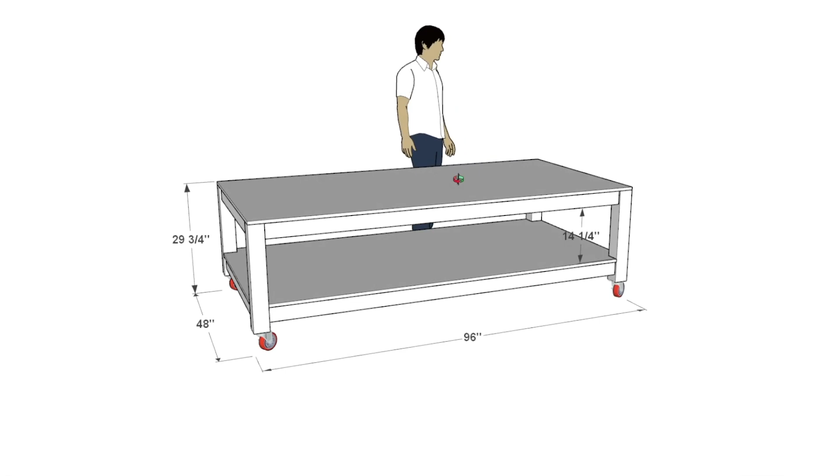It has been an upgrade from having to build things on the garage floor, bending over, feeling like my back would give out at the end of the day. This bench makes building super easy. Alright, now before we jump into the actual build process, let's briefly overview this bench and go over what makes it so special. This way you can see if this is what you're looking for and you can decide if you should continue watching this video.

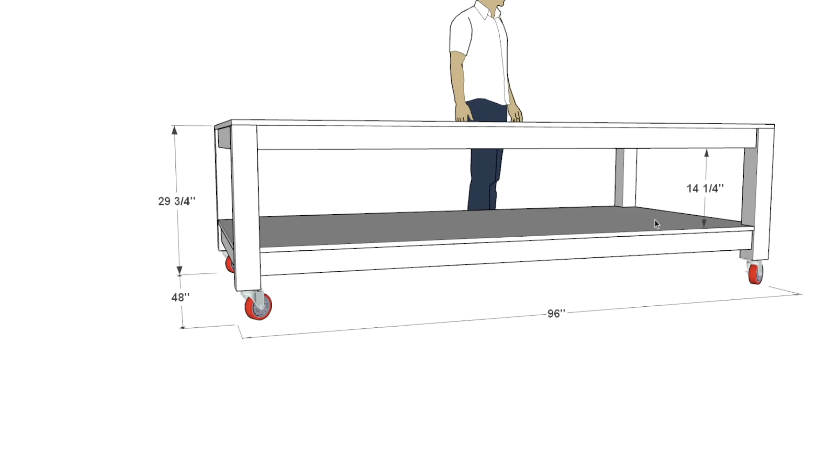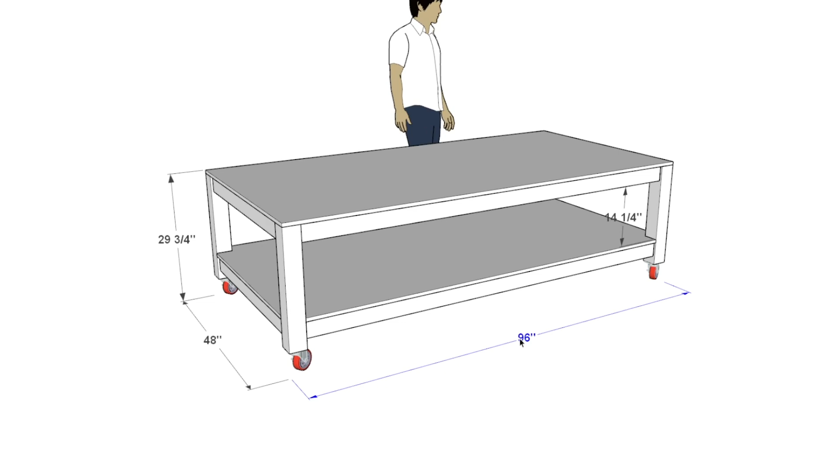Alright, so firstly, the bench is standard height. I initially thought about making it counter height because I thought it would be easier to build on. Then I realized when I have things I'm actually working on, they do take up room too. And honestly, for me, being 6'1", this is the perfect height. The overall dimensions are 96 inches by 48 inches by 29 3/4 inches tall, with the shelf at 14 1/4 inches.

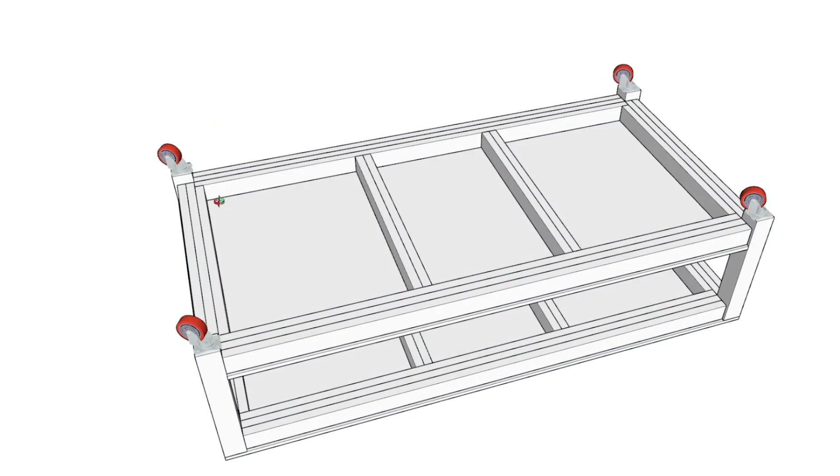So if we turn the table over, we can see what the frame looks like and why this bench is so heavy duty and has lasted for so long. This bench can hold some serious weight because its frame is reinforced with 3 layers of 2x4s, and the whole thing rolls around on 4-inch polyurethane swivel plate casters with brakes, and each of those wheels has a 400-pound load rating. The table is really good at moving things from point A to point B in my shop. For example, from the cutting station to the planing station.

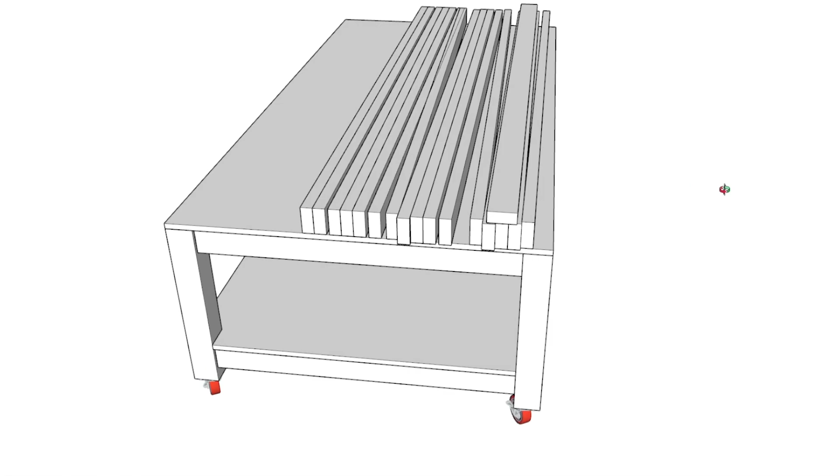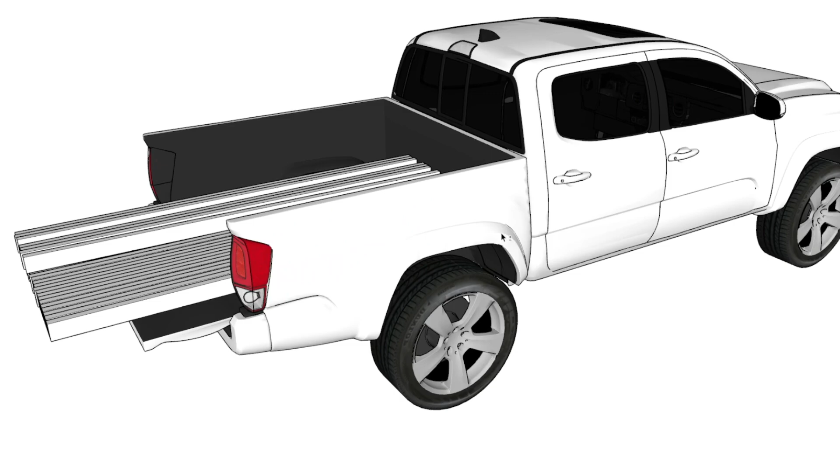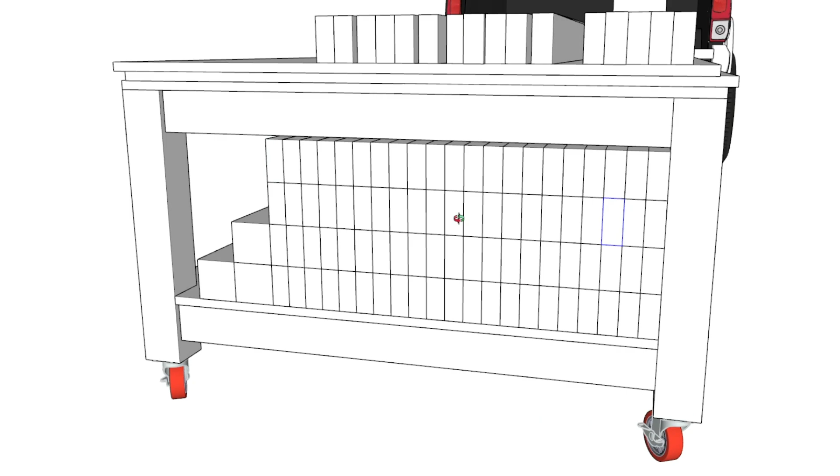It's also a really good lumber cart and lumber storage cart. When I would get a project from a customer, for example, I would just buy all the lumber at once, roll up the cart directly to the truck, and just load the workbench with the raw lumber. The top of the bench is pretty much level with the truck bed, so this made it really easy. And this workbench can handle 100 plus 2x4s in its storage shelf. Most of the boards I would work with were 8 foot long anyways, which fit in perfectly. And this was awesome because it left the top of the workbench empty so that I could continue working and utilize it for the actual build.

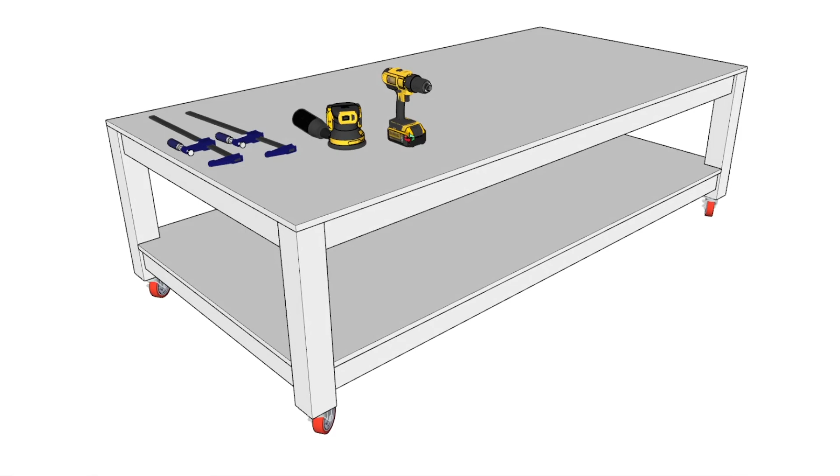The workbench is also a good place to store tools that are needed for a specific project. I know that each tool has its place in the shop, but when it comes to a specific project, like when I would get commissioned to build a patio set or a kid's playhouse or whatever, then I could just have the appropriate tools on hand and just store them underneath for quick access.

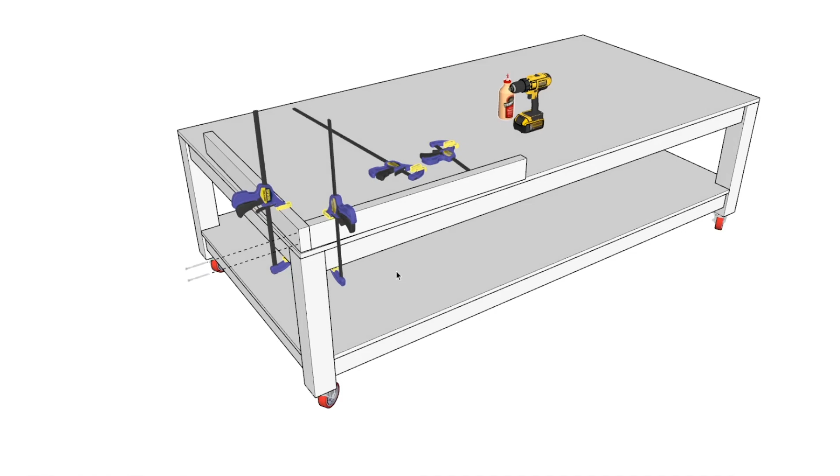My favorite part about this workbench is the ability to actually build things on it. First, it has a level surface. If you buy a 3/4 inch thick plywood sheet, it won't bend easily and it'll stay level. You can easily attach clamps at pretty much any place on the workbench top to hold lumber in place as you drill it, glue it, secure it with screws.

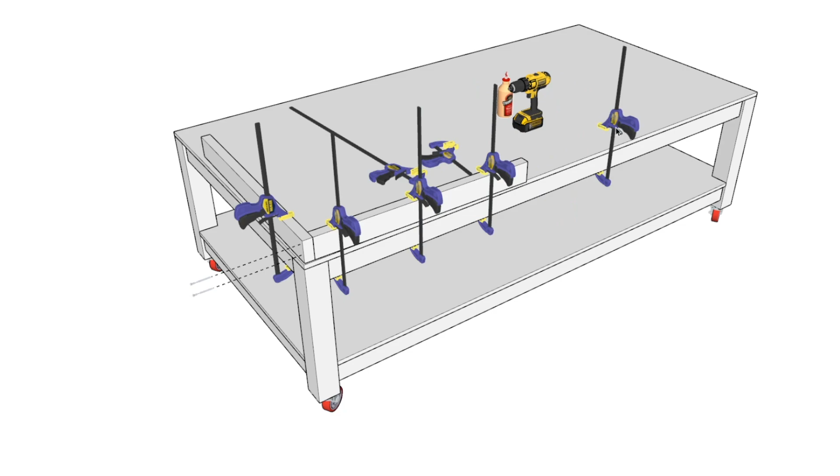This has been a real game changer for me as it allows me to make things so much neater. I don't have to rely on my body weight, for example, to keep things together as I secure them. I can use clamps and it's so ergonomic. The table height is just what I need, and I don't really do anything off the ground anymore. I build everything on the table unless it's a really big or bulky project. The table is also 8 foot long and it accommodates most projects.

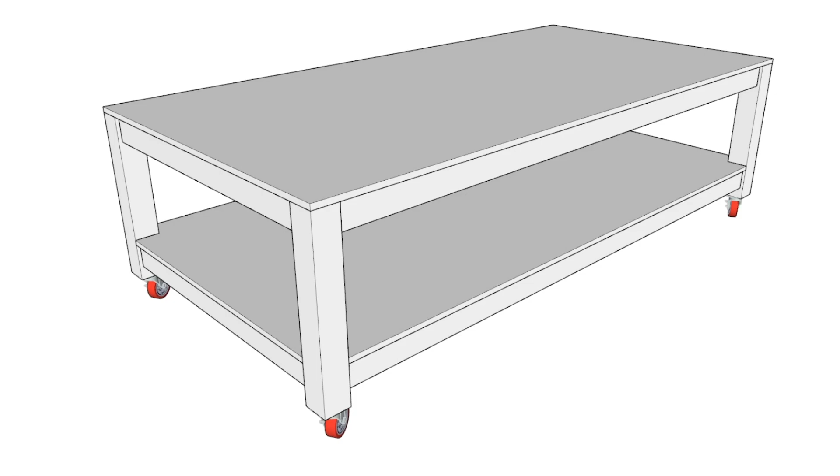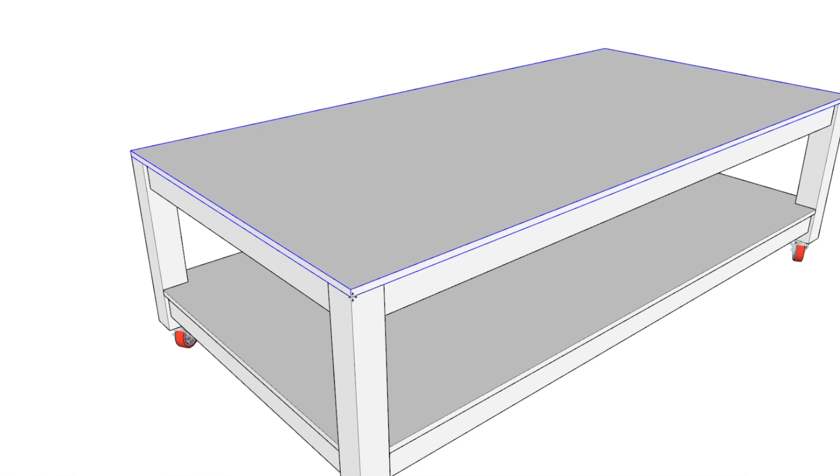And one last important thing to mention is that the tabletop will go through wear over the years. What I love is that it's actually just a full plywood sheet. So this means that it can be easily replaced. If you just flip the plywood sheet after a year or so, you will have a brand new surface. You're getting so much value out of the bench worktop. It's just awesome. I flipped mine after about 5 years of use and I had a brand new surface to work on. After both sides are used up, just buy a new plywood sheet. Easy.

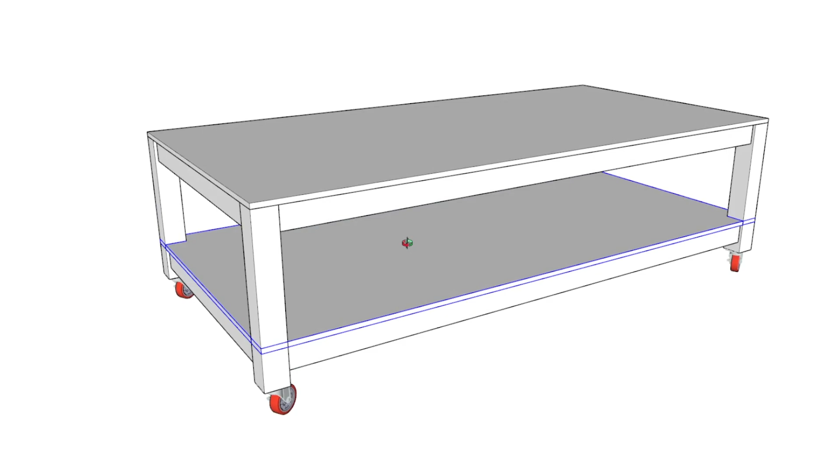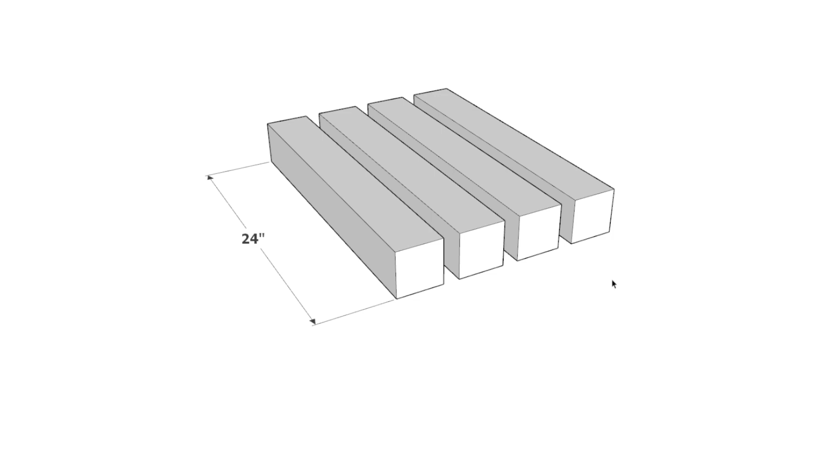Alright everyone, so let's go ahead and actually see how the workbench is made. First, you're going to start by cutting 4 24-inch 4x4 lumber pieces. These are going to be the legs of the workbench. You're going to need 12 89-inch 2x4 pieces.

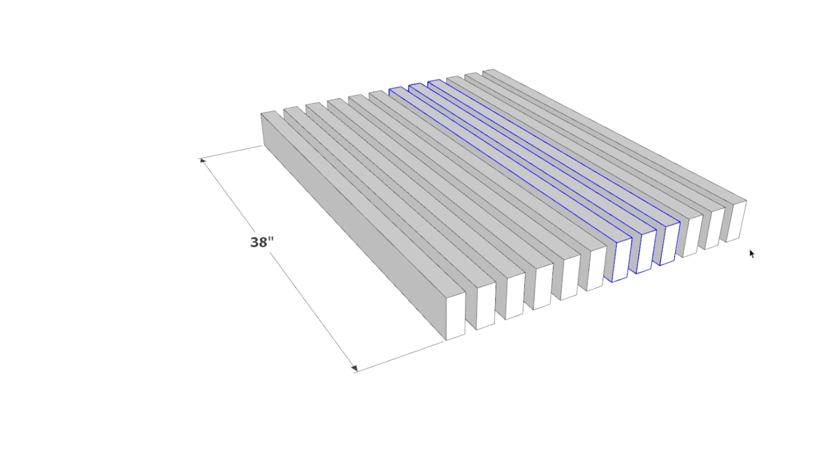You're going to also need 8 41-inch 2x4 pieces. And you're also going to need, let's see, it looks like 12 38-inch 2x4 pieces. You will also need 2 full-size plywood sheets, 96 by 48, ideally at least 3/4 inch thick.

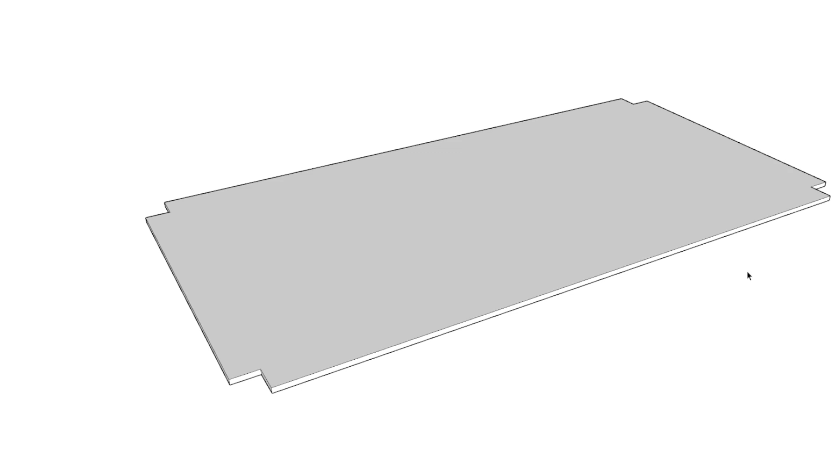Take the first plywood sheet and then just cut some notches into all 4 corners. These are going to be 3.5 inches by 3.5 inches, and you'll see how these work with the 4x4 legs that will go in through this area.

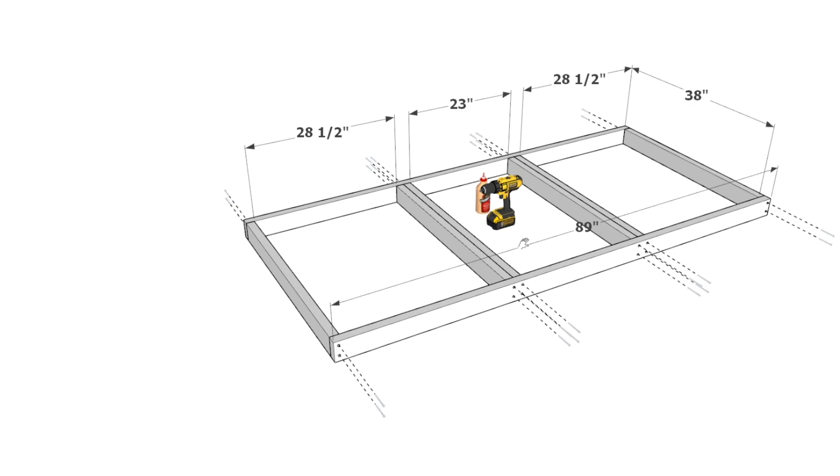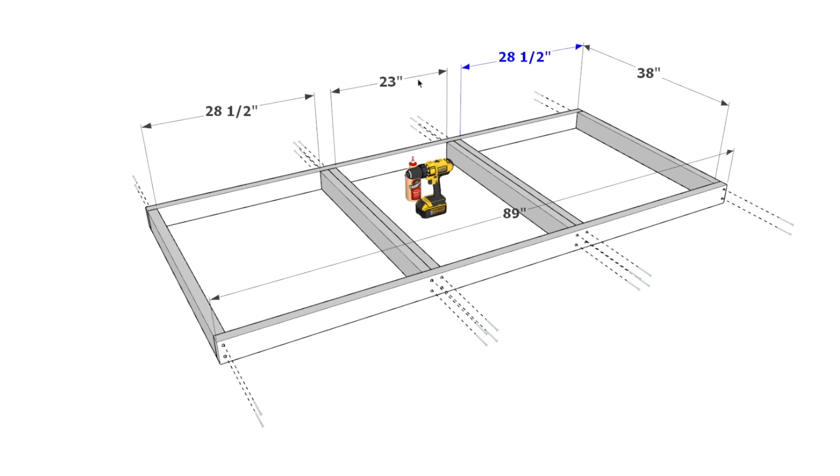Okay, so let's start building the frame of the workbench. So first you're going to need to take 2 89-inch 2x4 pieces and then 4 38-inch 2x4s. And then go ahead and use 3.5 inch screws and generous amounts of glue and just secure these in place at these distances.

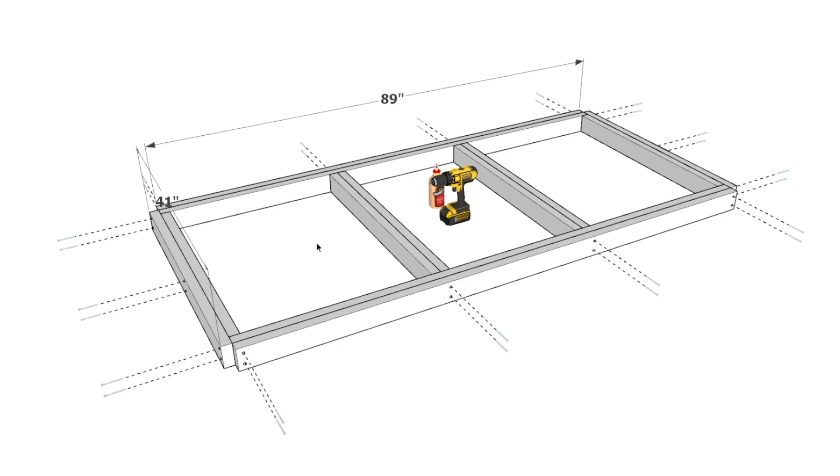Okay, let's go ahead and continue to build up the frame. So you're going to add the next layer of the frame. You're going to need 2 89-inch 2x4 pieces, 2 41-inch 2x4 pieces, and then use glue and in this case use 2.5 inch screws, because once you put them in you don't want them to show through to the other end. So 3.5 inch initially and now 2.5.

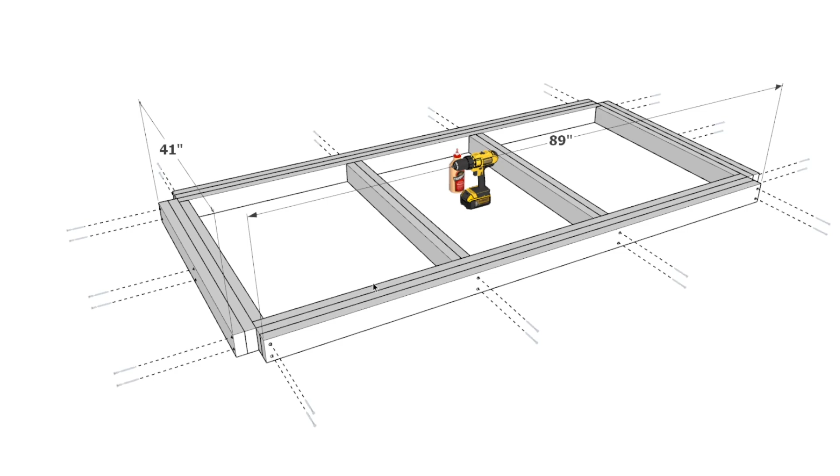And then you're going to add one more layer here. So you're going to need again 2 more 89-inch lumber pieces and then 2 more 41-inch lumber pieces. And in this case, use 3.5 inch screws because they won't show through, but you want it to be secure. And once you've got that, just go ahead and make a second identical frame. So these should be pretty solid pieces at this point.

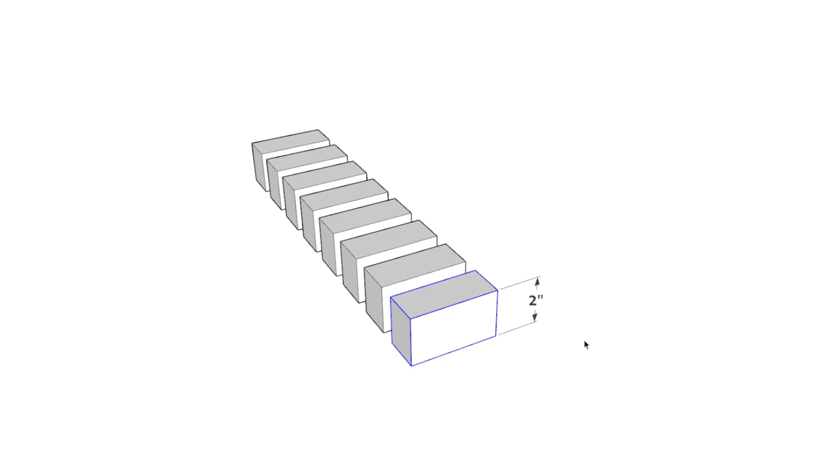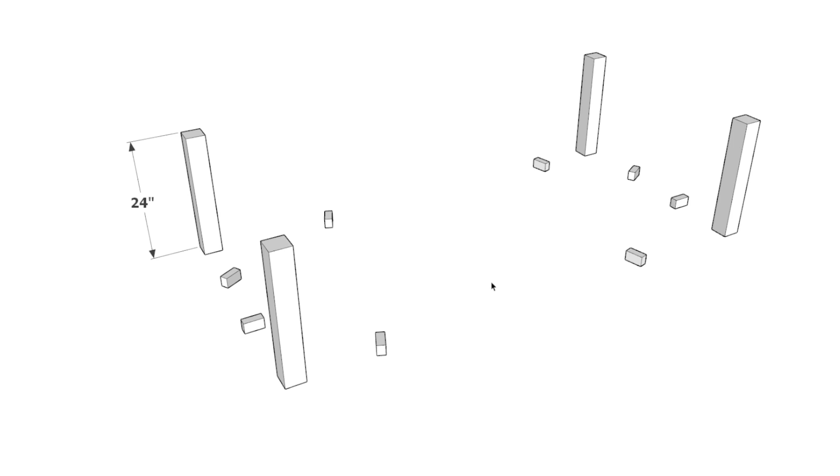Okay, now to secure the legs to the frames that you just made, you're going to need to cut some spacers. These are 2-inch-long 2x4 pieces, just from some of the scrap lumber that you're going to have from this project. And then go ahead and lay them out like this in a rectangular shape. You're going to put the 4x4 24-inch legs here as well, and then put your first frame directly on top of those spacers, and then the 4x4 legs into those grooves.

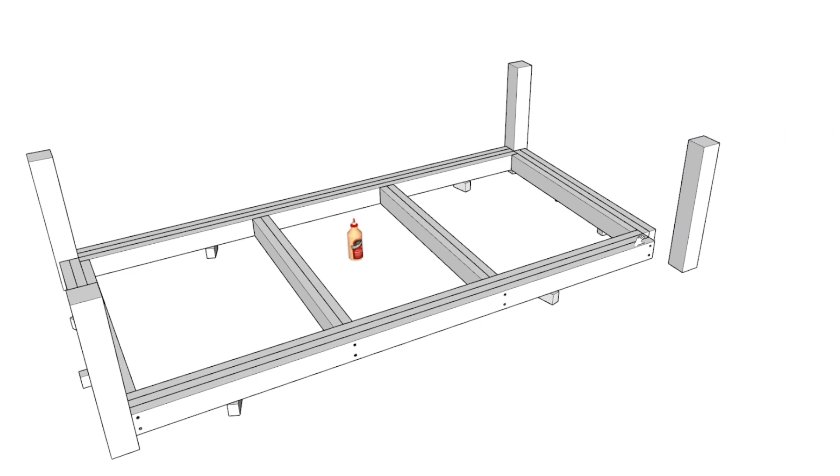Use generous amounts of glue for all of the areas that are going to be making contact with the post. So put glue on the ends here as well as on the post, just so that there's a good amount of glue, so it's a nice secure joint.

Okay, now for this step you're going to use ratchet straps. So if you don't have one that's long enough to go all the way around, just use 2 and then hook them together. And basically you're going to wrap this around the legs and then tighten it, but not super tight at this point, because you want to make sure that you're working on a leveled surface, and that none of the legs are higher or lower than the others. Everything has to be nice and leveled.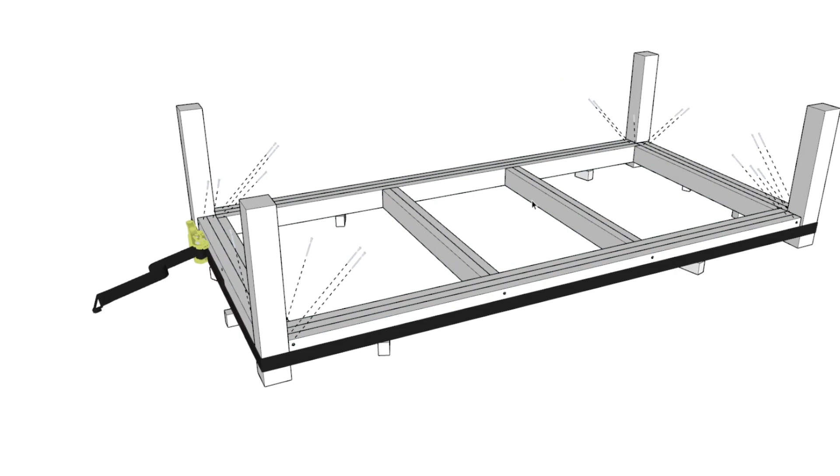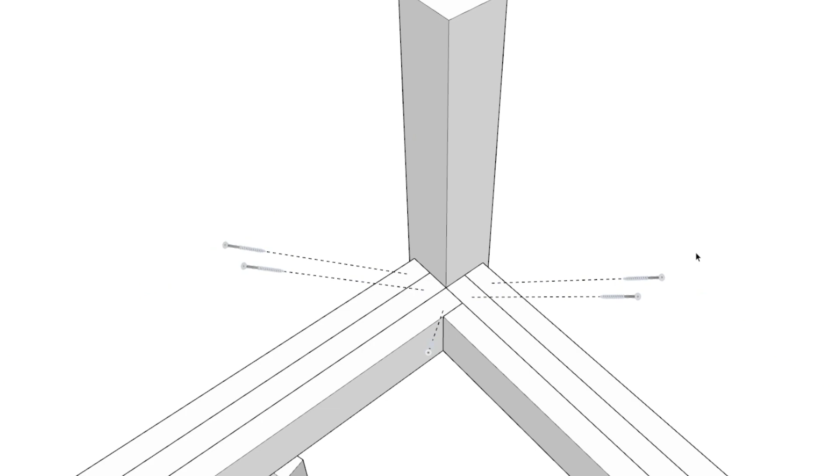Once you have everything in place, if you need to use a hammer, just kind of hammer things into place. Then go ahead and tighten the straps as tight as you can. They have to be really tight at this point, and then start adding these screws. So these are 3.5 inch screws, really important to pre-drill at this point. So use a countersink drill bit or just a drill bit to pre-drill those holes, and then add 3.5 inch screws like that. And this will be for all 4 posts.

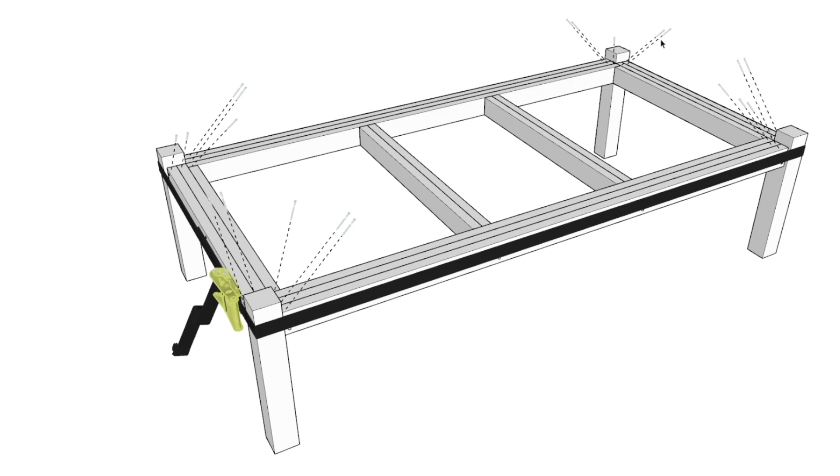Then with the help of a friend, flip the table over so it's standing like this, and you need to make sure that you're not putting pressure on the post as you're flipping them. So do it mid-air. The glue isn't dry yet and you haven't added all the screws, so it's not super strong at this point. But here, do the same thing. So pre-drill holes and then add 3.5 inch screws.

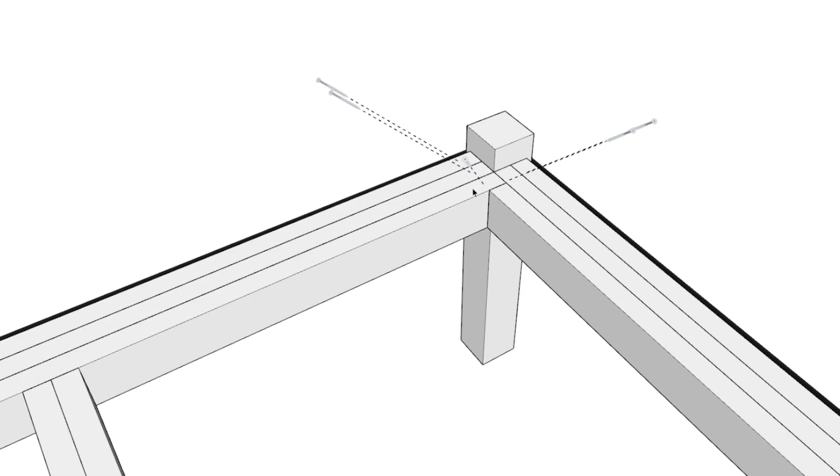At this point, if you're concerned about collision of screws or maybe your drill bit colliding with some of the existing screws that are already in there, just use an old drill bit or an old countersink drill bit, so that you're not going to feel bad if you do end up hitting one of the screws.

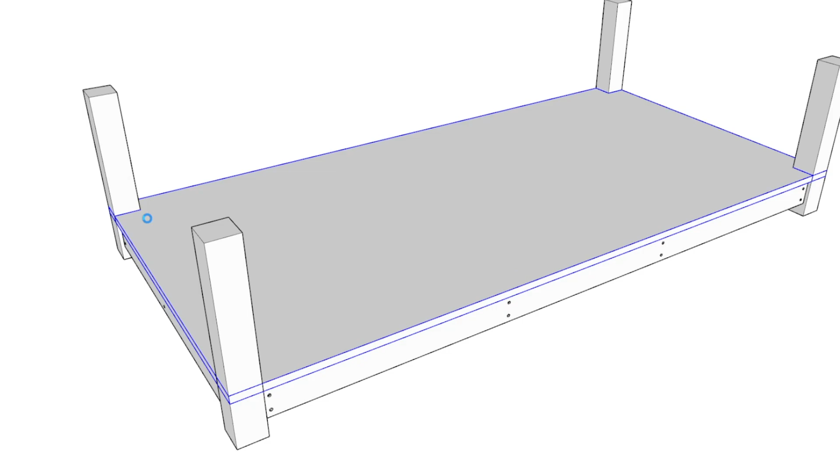So go ahead and add that to all the sides, and take that plywood sheet that you've cut notches into, and then just go ahead and place it here, so it'll go right there. And then this plywood sheet you can secure with just screws, or if you'd like, you can also add glue. This is not the surface that would typically be replaced. That would be the work surface. So just use 3.5 inch or 2.5 inch screws, add glue, and it should be secured.

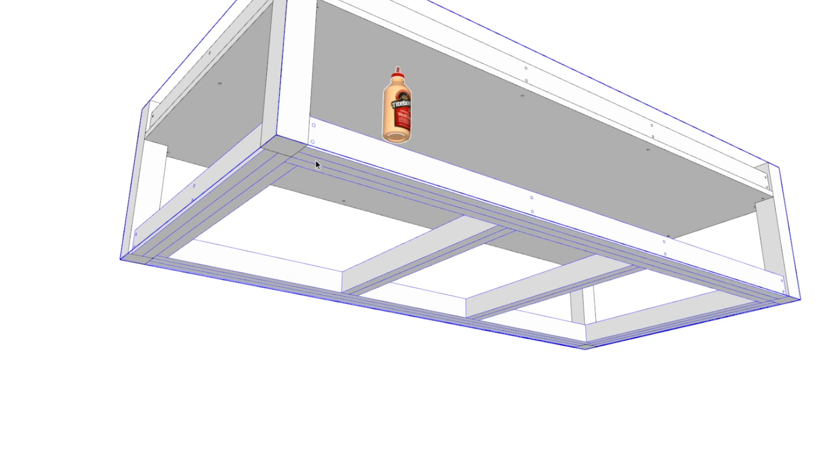So there it is. Okay, now to add the next frame, just flip the table over again, and what you're going to do is make sure that the frame is flush with the 4x4 posts here, or 4x4 legs. And then, just like before, add generous amounts of glue. Make sure that you have it on all sides, and you're going to start adding screws.

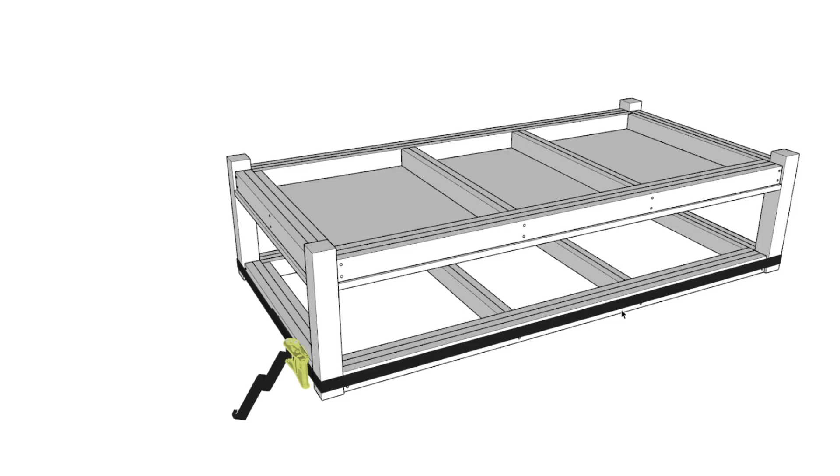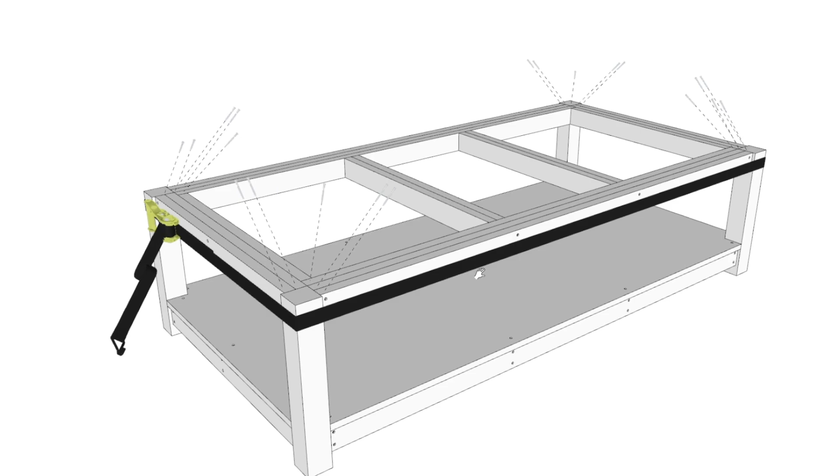So add the straps like before, again loosely at first, hammer things into place or into submission so that it all goes into the correct spot. And then go ahead and add the 3.5 inch screws. Again, make sure that you pre-drill so that the wood doesn't split. And then, with the help of a friend, flip the table over. It should be pretty heavy at this point. And then go ahead and add those from the top as well. And then release the straps.

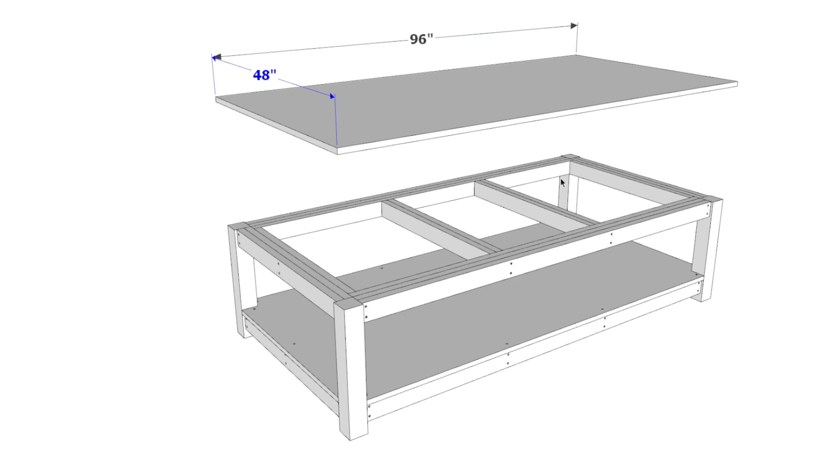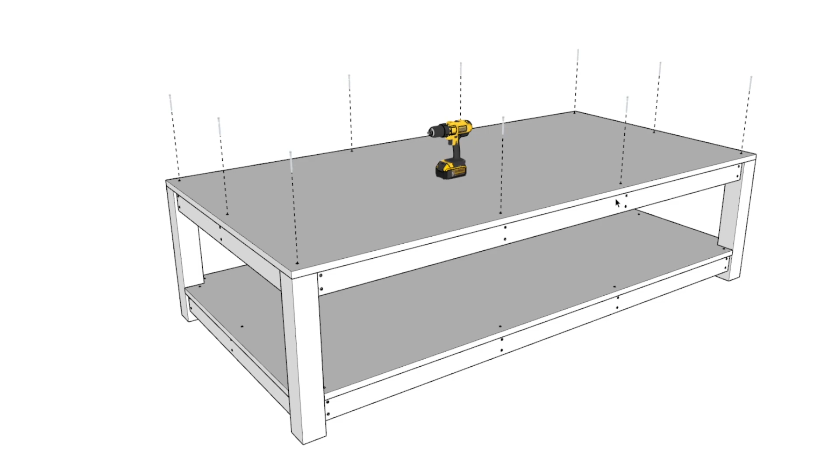And so at this point, you're going to add the workbench top. So it's just a full plywood sheet, 96 by 48. And then secure it in place using 3.5 inch screws or 2.5 inch screws. And I'm showing glue here, but I actually would not add glue here. The reason why is because you want this surface to be replaceable. You want to be able to turn it over when it's gone through some wear and tear, and you need a perfect and leveled surface once again.

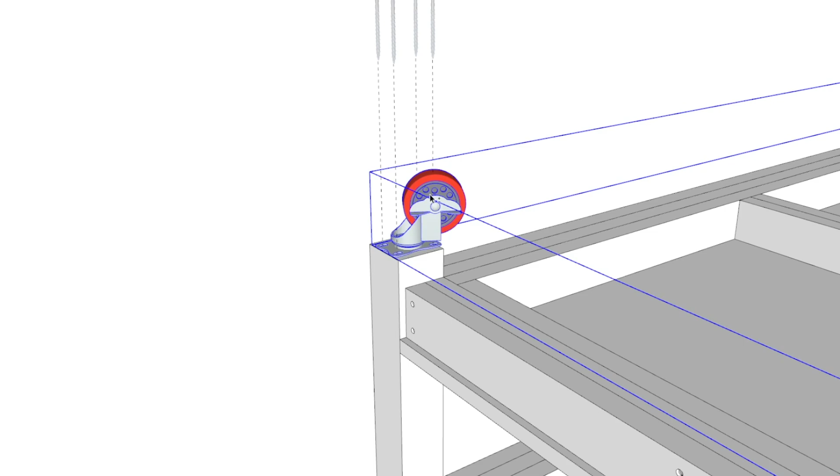So all right, now let's go ahead and add the wheels to this workbench. So the wheels make it super useful, honestly. Without these wheels, it's just a table that's going to sit in the corner. So what I've done is I've used the wheels from Home Depot, and this model shows that they kind of overhang a little bit. They actually do that in real life. So what I did is I just kind of centered it as best as I could.

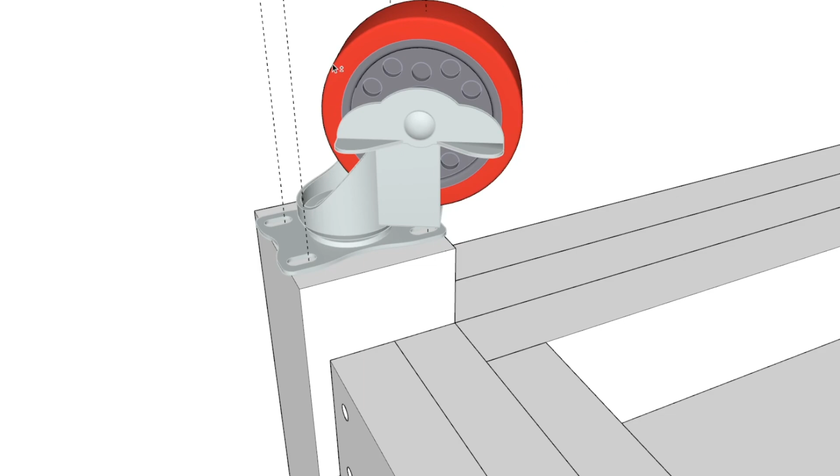And to secure the wheel to the leg, I actually used 4-inch long screws. Now these screws are thick. They're going to be really fat usually. So to make sure that this post does not split, because not only is it holding the weight, but also these two frames are attached to it, you really need to pre-drill this here.

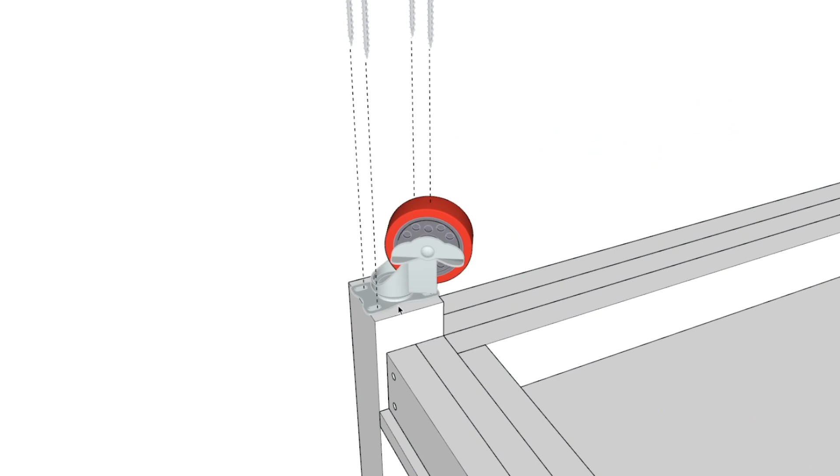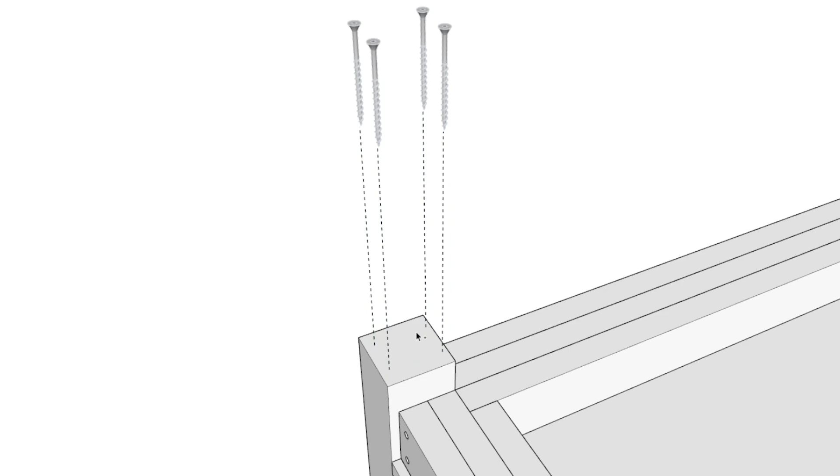So what I did is I used a nice thick drill bit, and I just marked the area here that I needed to pre-drill. Then I drilled those holes pretty much the entire depth of the screw, maybe left a little bit so I could still catch. And then I added these to the wheel so that it was nice and flush. And that way the wheels are going to stay in place and they're going to be able to do their job, and then you're not splitting that post.

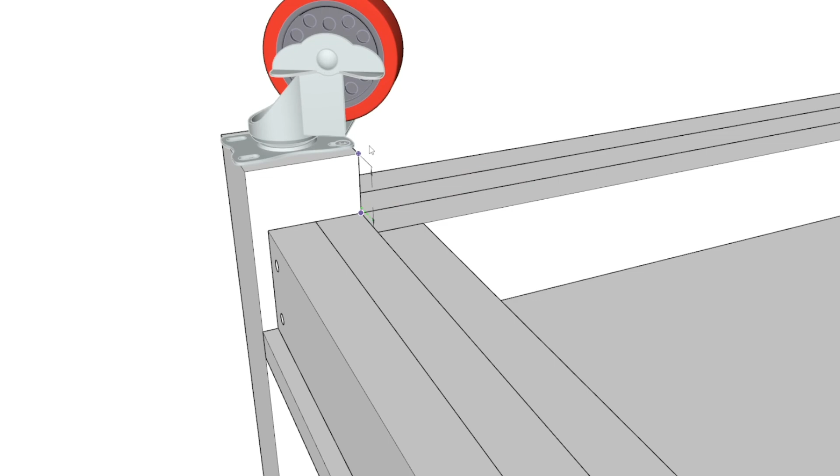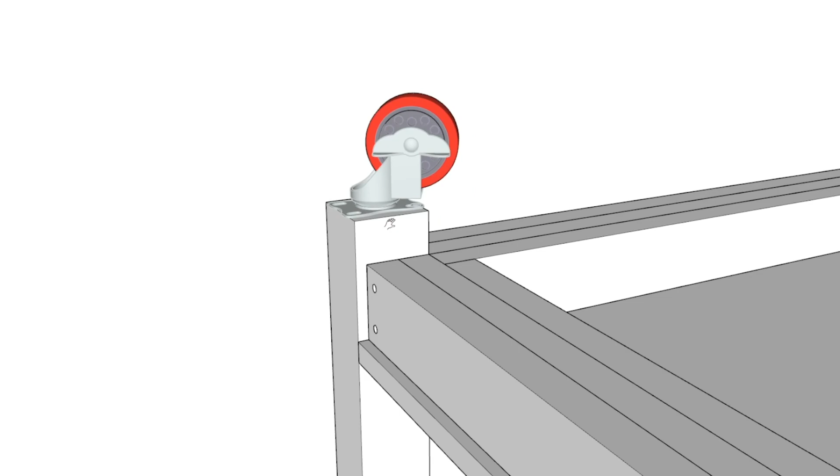The reason why we left that space of 2 inches is so that this 4x4 does not have that collision between the screws that are coming in through here and the screws that are coming in from the wheel as well. So there's a little bit of a space, but you could use longer 4x4s if you want the table to be taller, or if you need that shelf to have a bigger gap.

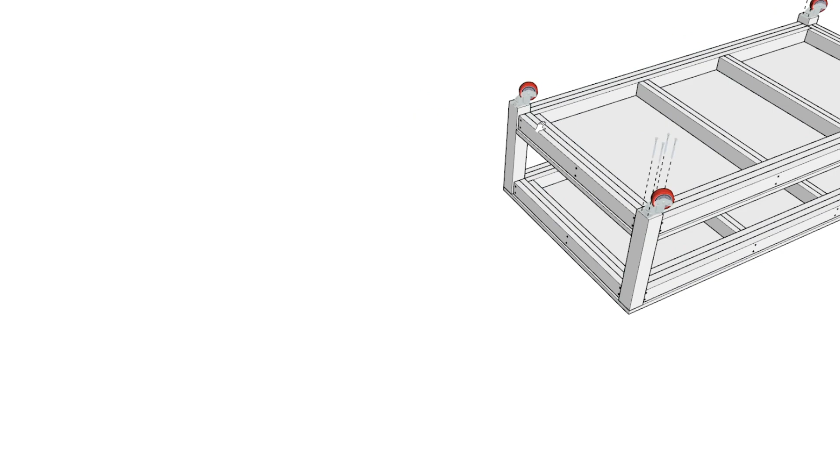Okay, and then just some finishing touches. So here you're going to sand the wood so that it's nice, no splinters. I don't sand the plywood because I don't want to strip off any of the layers. I want it to remain flat. But you can do the edges a little bit just so that it doesn't catch your clothing, and so it looks nicer. So that would be it.

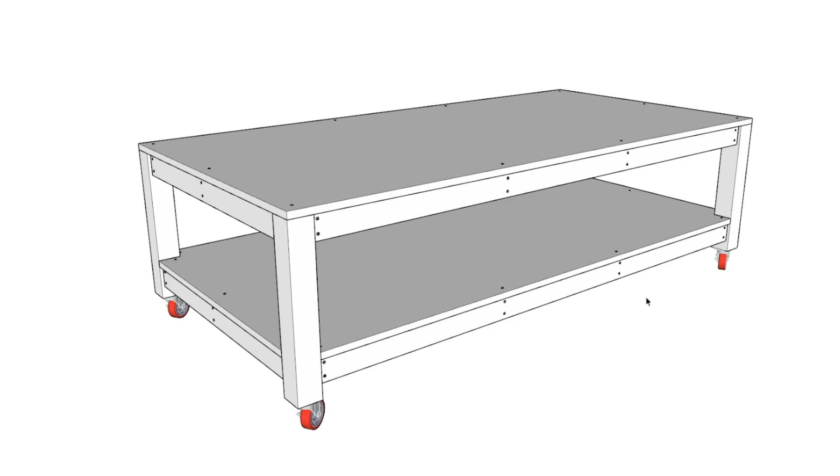Okay, that's it for our DIY workbench build. I hope you're feeling ready to take on this project.